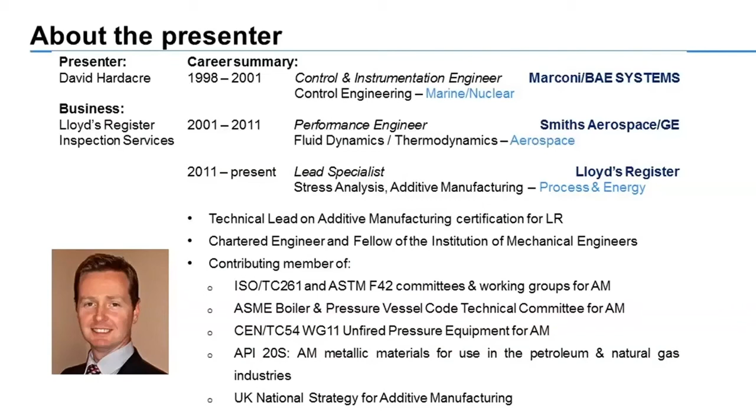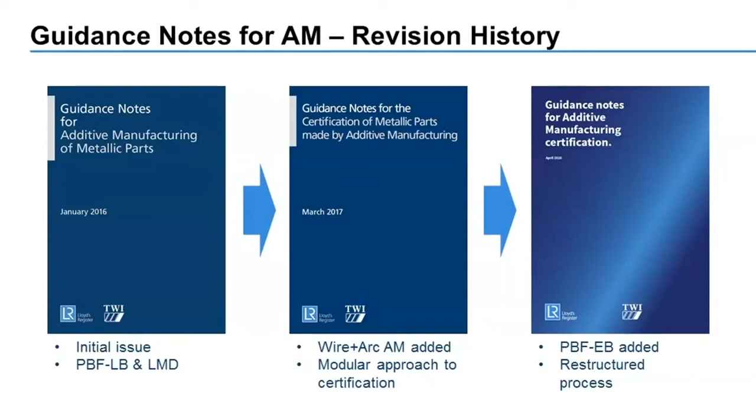So straight into the guidance notes. LR and TWI first published our guidance notes for the certification of additively manufactured metallic parts back in January 2016. It was updated in March 2017, and then very recently, April 2020, updated again. It's the updated version that I'd like to take you through briefly this afternoon, and then Carl will be talking about how that applied to the actual certification, well, qualification of the TWI facility.

So very basically, at a very high level, in order to certify a part which would have a known application, a prerequisite of that is certifying the material. In conventional manufacturing, if you were to purchase bar, forging, or plate, then that material comes with a material certificate. But with additive manufacturing, the part manufacturer is also the material provider, and so they need to satisfy both sets of requirements. So we need to certify the material as well as certifying the part.

Just like other material production methods, a prerequisite of certifying that material is qualifying the facility that produces it. So very basically, the fundamental foundation stones of certifying that facility consist of design, the feedstock, and the build plan. So the design, the 3D CAD model that inputs to the process, the feedstock, be it powder or wire for metallics, and the build plan, which would cover everything else - all of the build parameters, paths, etc. We'll talk about that in a moment.

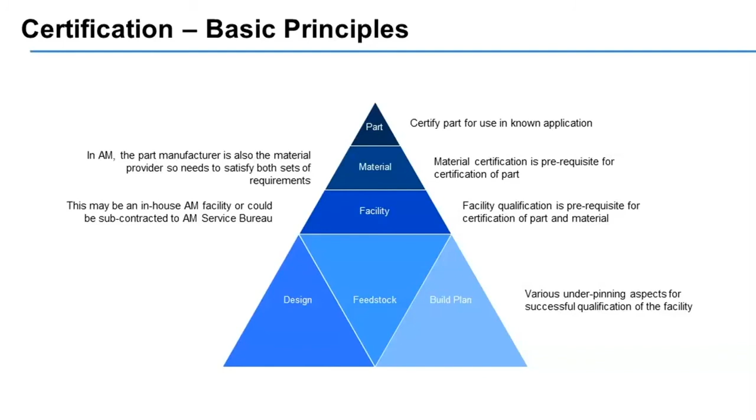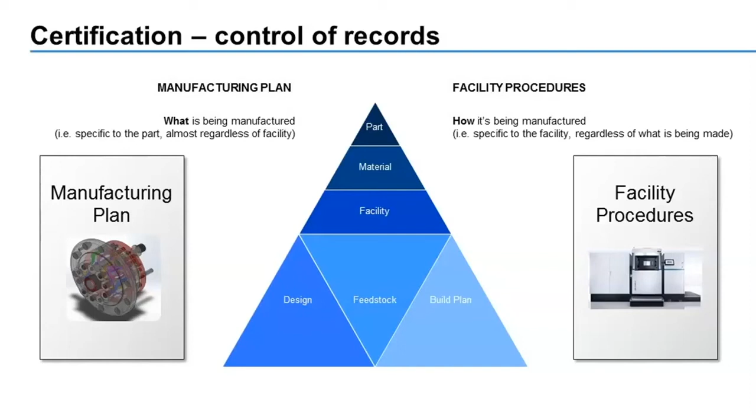So in order to certify a part, by the end of the process, we're basically compiling two sets of documentation, which is how we worked it with TWI through their facility qualification. On one hand, you've got the manufacturing plan - this contains everything that is specific to what is being manufactured, specific to the part and the material, almost regardless of the facility. On the other side, we have the facility procedures - this covers how it's being manufactured, things that would be typically the same every time, but aren't specific to the part that's being made.

So whatever you're making, those procedures and work instructions typically remain constant. When we're looking at the facility procedures and qualification, as well as the manufacturing plan, we can basically think about 5 functional areas: design, materials, manufacture, post-process, and inspection. Within each of those functional stages, it subdivides into three categories: people - so who's involved in the activities, what's the competency of those people, and how do we demonstrate that - the process itself that's being followed, and the product, so that's the output from each stage.

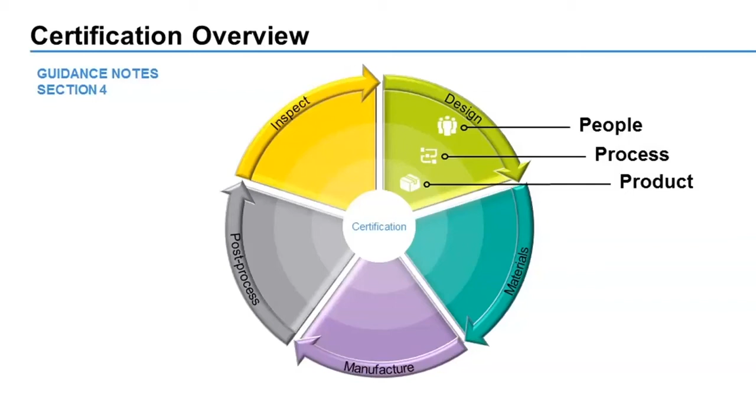And also, of course, these stages are interlinked. They don't occur in isolation. So when you're designing, for example, obviously there's a consideration of all of the other areas. You're designing for manufacture in terms of buildability. You're designing for post-process - certainly if you've got complex internal structures that you need to finish the internal surfaces of - and certainly you're designing for inspection as well.

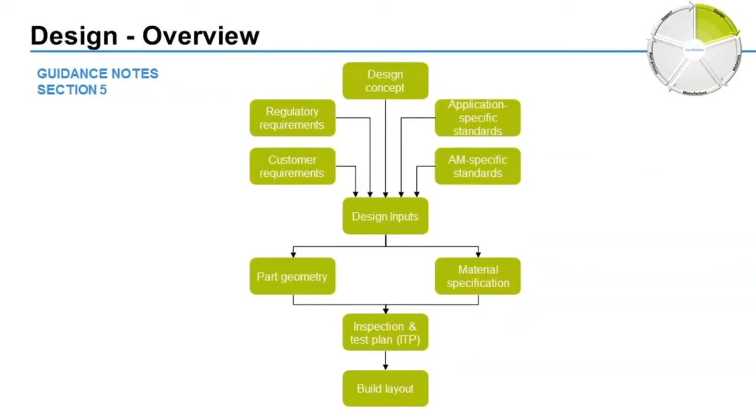So stepping through the guidance notes in terms of an overview, we start off at the design section, and primarily we start off with a requirements capture. So this is capturing all of the design inputs.

Typically a manufacturer will start off with a design concept. It might be a similar design, or something they've produced before using conventional manufacturing techniques that they now want to produce using additive for one or more reasons. But then you would take that design concept and first look at the regulatory requirements.

What are the legal requirements for this part? I've taken the example of a valve. If you were producing a valve in Europe, the legal requirements would be the Pressure Equipment Directive. There may be some application-specific standards, so a valve standard. The customer may have their own particular requirements, maybe in terms of pressure drop across that valve or discharge coefficient. And then when it comes to additive manufacturing, there will be some AM-specific standards as well, because unfortunately the valve standard doesn't contain anything about additive manufacturing yet. So the AM-specific requirements would hopefully be captured within AM-specific standards, but I'll come to that in a moment.

So at this point, you've collected your design inputs, you've got all your requirements, and it becomes a case of: how do we demonstrate that we're satisfying or complying with all of those requirements?

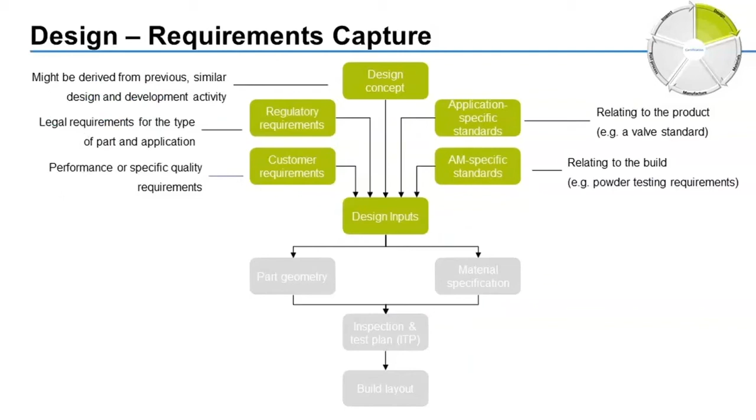So when you've got all of those design inputs, your part geometry, the manufacturer would develop the part geometry to meet the design inputs, and also select a material specification.

So the application-specific standards - for example, if we're talking about a valve, unfortunately there's nothing in there about additive at the moment. So there are some of the requirements, but not all of the requirements. In an ideal world, it would cover additive and everything would be developed in compliance with that standard. So we need to fill those gaps.

And the best way of filling those gaps would be to use some AM-specific standards. Now, I'm going to talk about this a little bit later, but unfortunately, not all of those standards are available either. So we still have some gaps remaining.

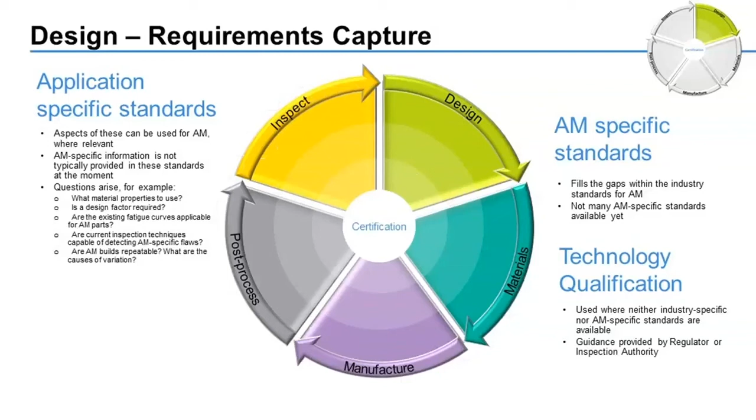And we fill those remaining gaps through a technology qualification approach. So that is used where there's neither industry-specific nor AM standards available. And it's about demonstrating an equivalent level of safety - filling in those requirements gaps to demonstrate that equivalent level of safety, which may include additional testing or inspection.

This is the slide that I was thinking of. So once you've collected all of your design inputs from those various sources, the manufacturer defines the part geometry. So if it's a like for like compared to the conventional, then fine - you would take the same probably design by rule approach that you've taken before.

But if you want to get the best out of additive manufacturing, then typically you're designing for the method that you're using. So it's at this stage that a manufacturer might employ some topology optimization, either for lightweighting or for some performance enhancement. If they were to do that, then the design by rule option basically disappears because you start to get very complex geometries. But the manufacturer is then forced down the design by analysis route, which typically involves something like finite element analysis.

In parallel with the part, of course, is the material. So those two things go hand in hand, part geometry and material specification. And I need to be clear here that this is the formed material - this isn't the powder or wire feedstock that's going into the process. This is the formed material.

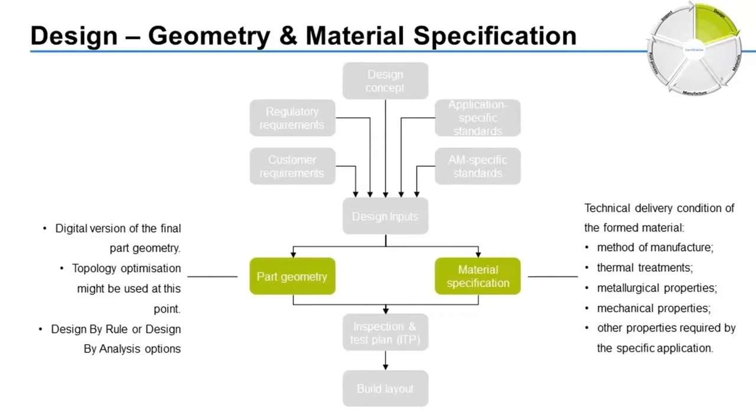So it's at the design stage that the manufacturer will specify that, and this is where you'll get the acceptance criteria that we'll test against later on. But the designer will also specify the delivery condition of the material, so that includes specifying any thermal treatments at the post-processing stage. And then moving on from those, the manufacturer will develop an inspection and test plan.

So how they plan to inspect it, how they plan to test the material, because of course before you start the process you don't have the mechanical or metallurgical properties. So those need to be established after the build in order to demonstrate compliance with the material spec and any standards or regulations that apply.

And then, of course, there is the build layout, which includes not just the part, but any test specimens, qualification test coupons, support structures, etc. And the number and location and orientation of specimens is part of the process.

Determining how many specimens you need very much relates to the part geometry, in terms of the number of different features, changes in wall thickness, or different types of feature that need to be represented. The specimens need to be representative of that part for demonstrating compliance with the spec. We need to understand that we've mitigated the risks not just of variability of properties throughout the part, but also potential variability throughout the build space. I'll mention that a bit later.

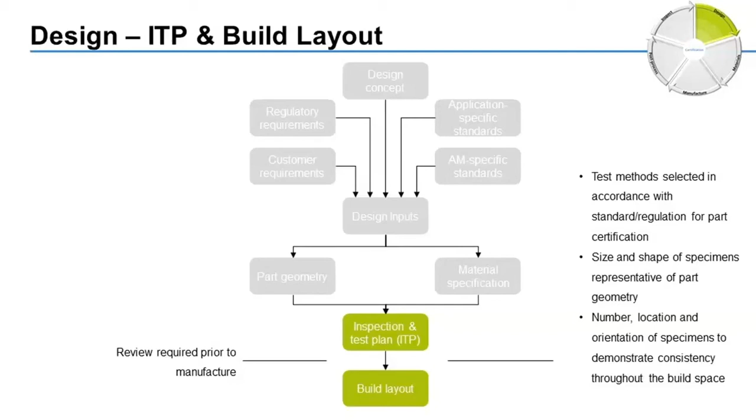Moving on to the material stage, from the design stage we've got our requirements capture and our formed material specification. The manufacturer also has their equipment, which we'll come to in the manufacturing stage. Typically they would then use this formed material spec, though they haven't made anything yet. It's important from the design stage to get buy-in from an inspection authority.

If you need third-party certification, it's very important to get buy-in from your certification authority before progressing to manufacture, because you do not want to find out later that your certification authority wanted more specimens, or different types or sizes of specimen. That all needs to be assessed beforehand, so there are no surprises or rebuilds later on. From that formed material spec, the manufacturer can now specify their feedstock spec.

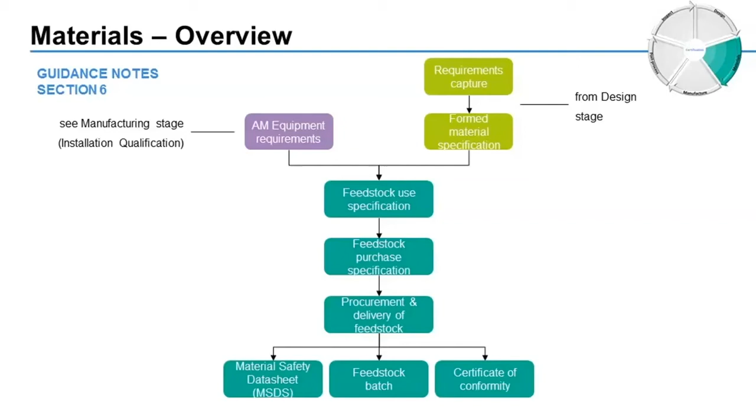When it comes to powder, if there's any recycling of that feedstock, there may actually be two specifications here: a use specification and a purchase specification. If it's always virgin, or if it's wire with no recycling going on, maybe a DED process, then they're often the same. But if the feedstock is being reused, those would typically be different, because you wouldn't want to order against the same spec you're using it against. If you order powder that is only just within the limits of that specification, the first time you recycle it, it may well go out of spec, and then you've got potentially a lot of wasted powder. So you would tend to develop a tighter spec for purchasing against.

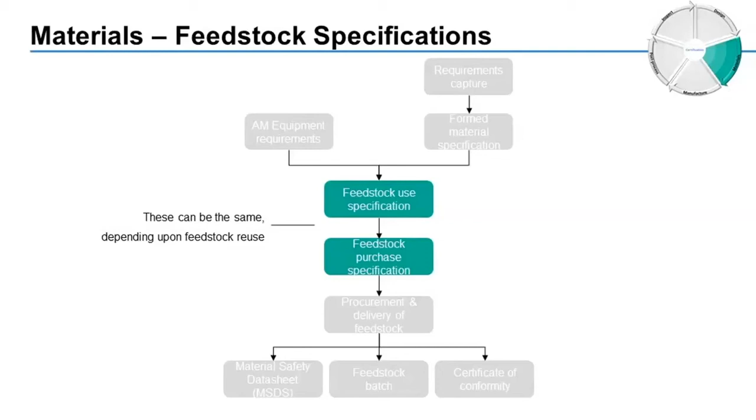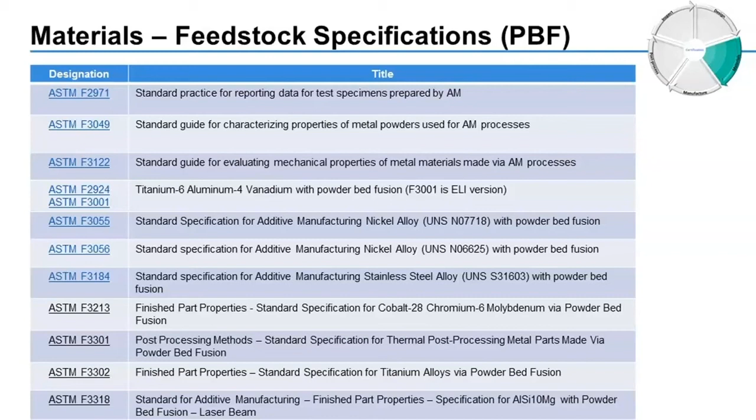When it comes to wire, typically if you're using a DED process, many manufacturers would purchase wire against a typical welding consumable spec, although many are now going down a more bespoke route, tightening up those specs again and ordering wires that are specific to their process. But it very much depends upon the equipment setup that you have.

When it comes to these feedstock specs, these ASTMs, they are just the starting point. They're very good in that they contain references to other standards and specs for different test methods. They have chemical composition requirements, minimum mechanical property requirements at ambient temperature, and they also contain some guidance for various thermal treatments.

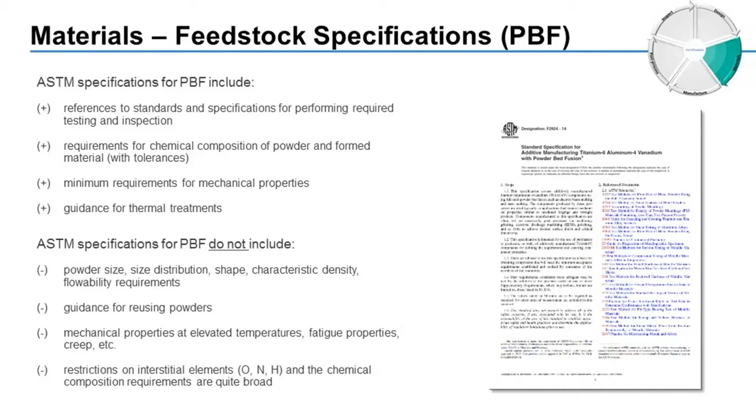What they do not include are other powder requirements, like regarding powder size and shape and size distribution. They don't have any guidance for reuse of powders, and they don't have any elevated temperature mechanical property data or other properties like fatigue or creep or corrosion. So they're not complete. They're a good starting point, but the manufacturer would need to develop those to make them fit to what they actually need for their application.

The specs are machine agnostic, meaning they're not targeted at any particular powder bed fusion machine. The manufacturer is responsible for the feedstock purchase spec, which would be based on those, and it's good practice for a manufacturer to record and compare properties for each batch, keep a log, and then they can learn from experience in terms of what works in order to either tighten or relax their purchase specs a little bit.

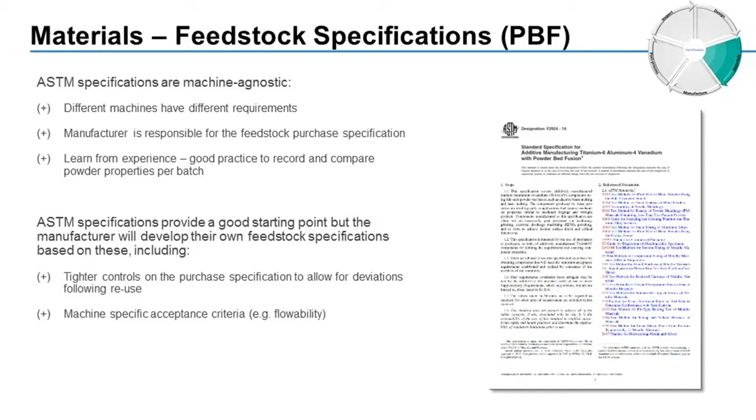When it comes to procurement and delivery of the feedstock, the powder would be delivered with a material safety data sheet and a fairly basic certificate, containing maybe chemical composition, powder size distribution, and perhaps not much more than that. So as part of certifying the formed part, it would be a requirement to do some further testing of that feedstock and characterization.

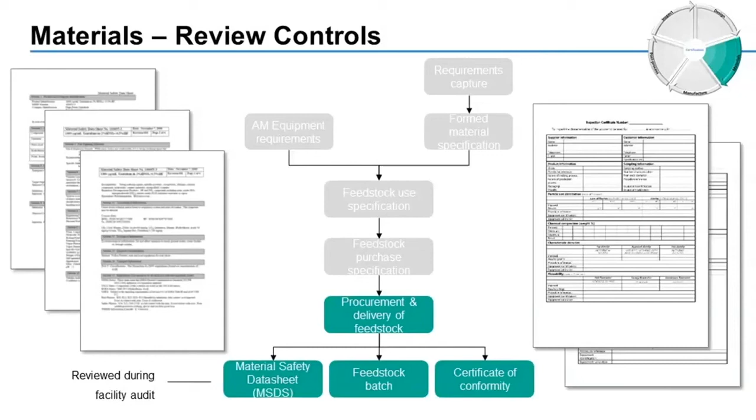The manufacturer, certainly TWI in the case of their facility qualification, had to perform independent powder testing at an independent lab and produced certificates that looked like this. This is a generic one, but it's the sort of information captured in a powder characterization: how it's sampled, which method was used, particle size distribution, again which method was used, with convenient references to ASTM or ISO standards. These are just examples of methods - you might use light scattering, for example, in which case you'd customize this certificate to your needs.

Chemical composition is fairly self-explanatory, but what's measured there would be compared against the spec, of course. Characteristic densities - apparent density as a minimum, apparent and tap density is pretty common. Some manufacturers will use those to develop other indexes, like the Hausner ratio or Carr index perhaps. Again that becomes part of the learning in terms of their register, what they know works for their particular equipment setup.

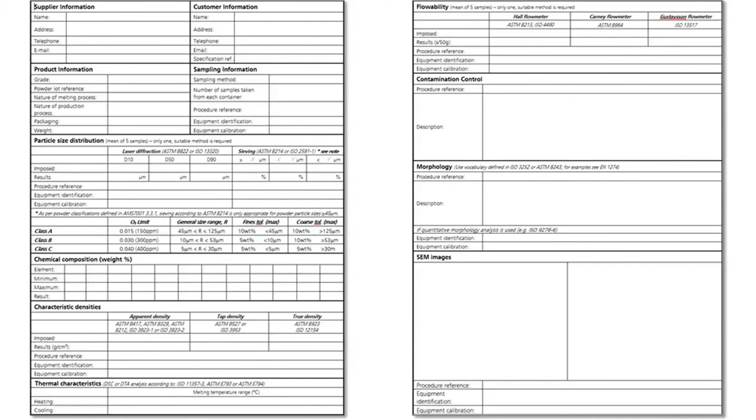So moving on to the manufacturing section. Once again we've got these inputs from our design stage - our geometry, our feedstock spec that we're going to use for the qualification. When it comes to qualifying the actual equipment and processes within the facility, you basically follow a three-step process: IQ, OQ, PQ. IQ is installation qualification, OQ is operational qualification, and PQ is part or product qualification.

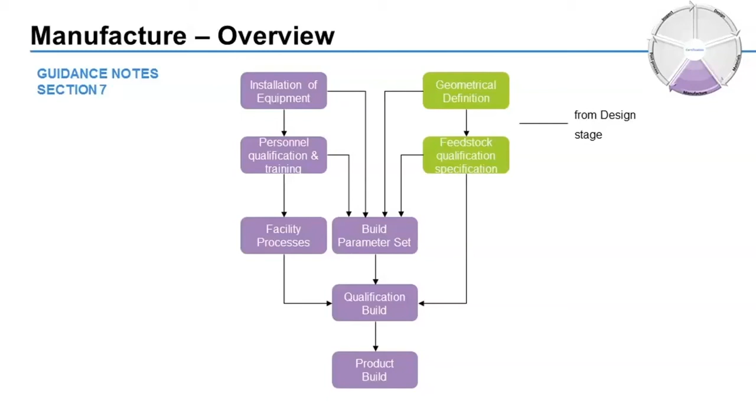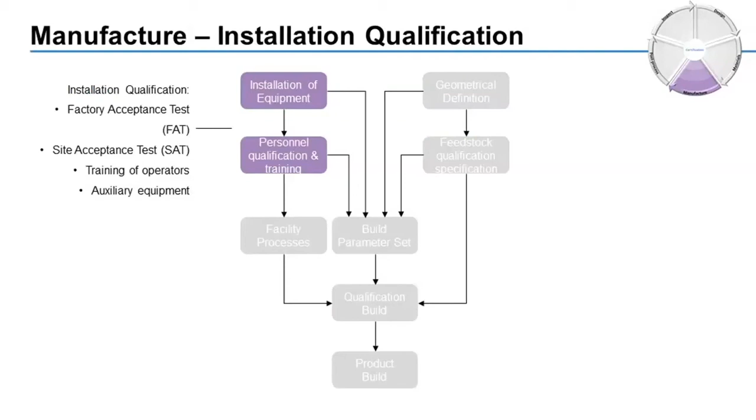IQ, the installation of the equipment, tends to have two steps really. There's the equipment manufacturer themselves who will perform a factory acceptance test of that equipment, and then when it's installed they do a commissioning activity or site acceptance test, with training of operators usually occurring there as well. There may also be some auxiliary equipment, things like lifts, sieving stations, that sort of thing.

Moving on to the operational qualification, the OQ stage - the quality management system is just the very first step. Certainly as part of the AM facility qualification at TWI, they already had a QMS, an ISO 9001 certified QMS system in place, which we would expect to see as a prerequisite really. It doesn't mean we wouldn't be able to continue with an AM facility qualification, but that tends to be the first step, just to make sure those sorts of systems are in place in terms of revision and quality control. But there's nothing in those that is AM specific at the moment.

When it came to the AM specific aspects, looking at the departmental procedures in terms of what the activities are, who performs those activities and when, and a level below that, TWI developed various work instructions with very detailed instruction on how each activity was performed. That could be something like a pre-build checklist, making sure you've selected the right substrate, how that's installed into the machine, fasteners correctly torqued, or if it's WAAM, clamps providing the necessary restraint, etc. Very step-by-step instructions, which quite often lead to different records being generated, which all need to be stored either as part of the facility procedures or within the manufacturing plan if specific to that part. For example, in the substrate example, selection of the substrate, especially if it was to become integrated within the final part, would be part of the manufacturing plan.

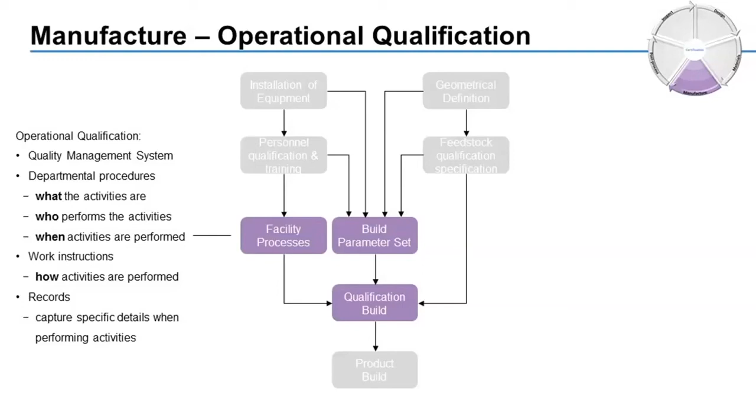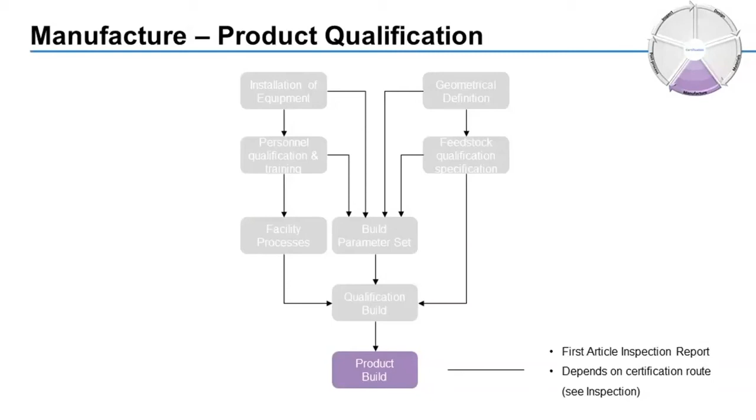And then after the OQ stage, where you've basically built qualification builds but not actually made any part, the manufacturer would then be ready to actually produce the first part. A first article inspection will be required for the first off, and then as you progress to further parts within that batch, there would be a much smaller test regime, just a few specimens, to demonstrate on a sampling basis that the manufacturer remains within the parameters of the range of their qualification.

When it comes to post-processing, again in section 8 of the guidance notes, you don't have to do thermal treatments first. You can separate parts from the substrate and then perform thermal treatments, but it's far more typical to do the thermal treatments first with everything attached, because one of the objectives is to take care of the residual stresses that build up. But it depends upon your process. If you're using powder bed fusion with electron beam, for example, that may not be such a big problem.

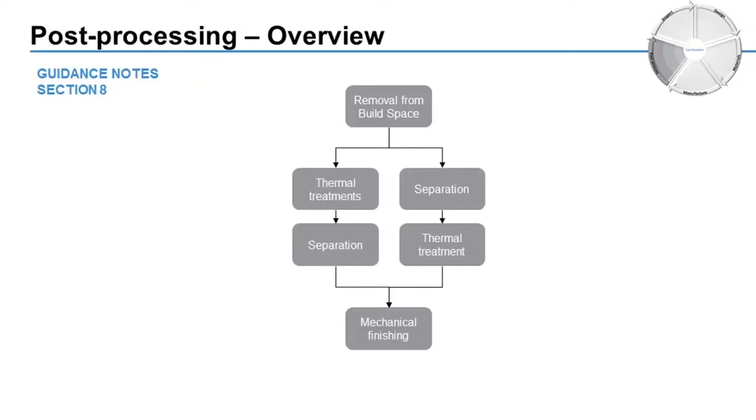It doesn't specify - the manufacturer can work either way, provided that the requirements are demonstrated through inspection and testing. But the point is that removal from the build space - there'll be a procedure for that in terms of the post-build checks, as well as the build monitoring, and that's witnessed during the facility audit.

Achieving the required delivery condition - so there might be a customized heat treatment or HIP stage depending upon the process used, or it may be a customized heat treatment, because standard heat treatments may not be the best for additively manufactured parts. And at this point, this should be the end of the property-changing processes.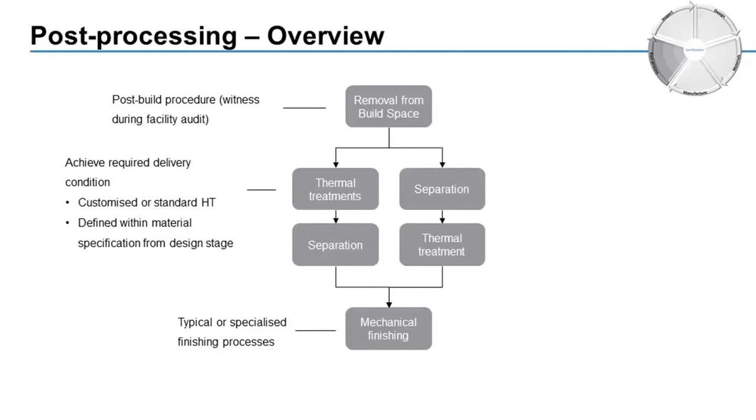So any mechanical finishing at this point would be about achieving the geometrical requirements - getting the right finish, the right geometry - but shouldn't really be changing the metallurgy of the material that's been produced. One point here, though, is that any post-processing intended to take place on the part also needs to take place on the test specimens in order for them to be representative.

So then moving on to inspection. Again, this is fairly typical in terms of the ITP - the inspection and test plan would have mechanical testing requirements, metallurgical test requirements, and non-destructive examination requirements. Depending on whether those criteria are met, it would be either a conforming item, in which case you produce your documentation that leads to certification, or a non-conforming item, at which point you need to get your customer involved on whether they would accept that as a deviation or corrective action.

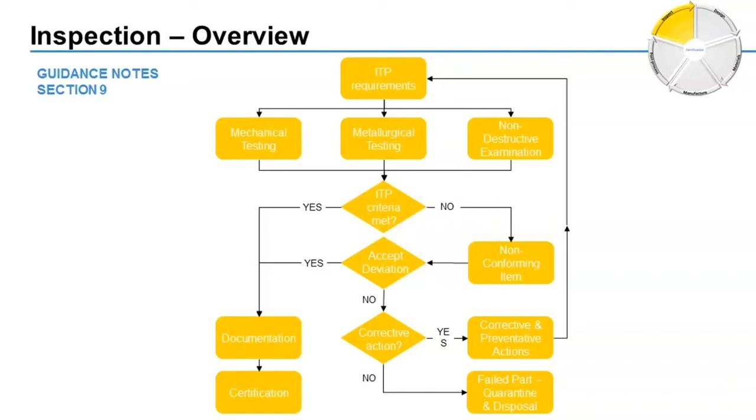So in terms of inspection, two routes: direct inspection or process qualification route. What I described before with the build qualification is the process qualification route. If you're making fewer - maybe a one-off part or smaller volume production - then the manufacturer can go down the direct inspection route, where the part is produced alongside multiple test specimens. We're short of time, so I'm not going to dwell on that, but if there are any questions, please put them in the Q&A.

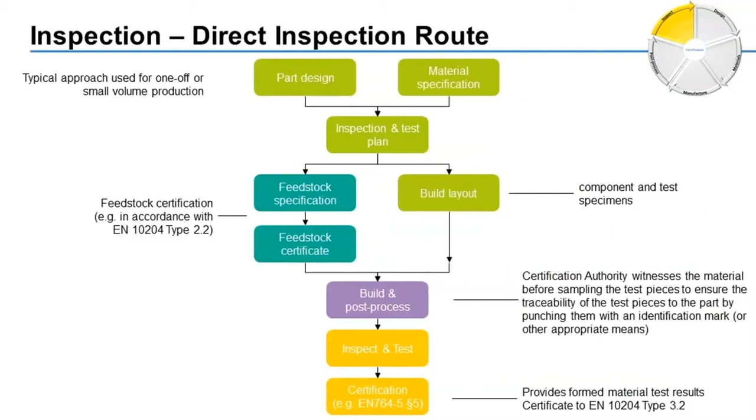And then when it comes to final certification, the first time, TWI, along with any manufacturer, would go through the whole process. But the next time they come to build a part, it's already a certified facility, so you wouldn't go through all of that audit again, unless something had changed - unless that facility audit was to be extended in scope, maybe adding a new machine or something. Typically you wouldn't repeat facility audits just for the sake of it, if it was producing a different part on the same equipment using the same procedures, etc.

And similarly, if you were going to a new facility but producing the same design, there wouldn't be the need to revisit all of the design assessment either, because there's no value in repeating that exercise once it's been done. One caveat here, though, is that witnessing of material testing is a prerequisite for any part certification. With conventional manufacturing, material has to be certified before you can certify the part. AM does not provide a loophole around that.

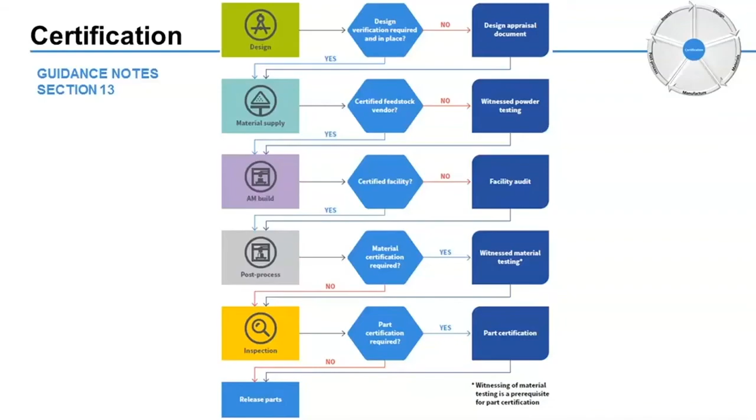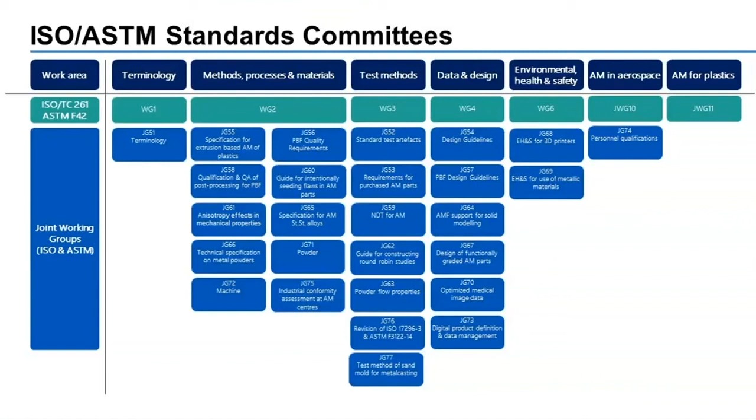I said I would mention standards. I'm running very short of time, so I'm sorry for rushing through, but these will be made available afterwards. I'm not planning on going through these in a lot of detail, but that's the landscape of the ISO ASTM standards committees.

This is split up into different joint groups looking at very specific items. These are the standards being produced at the moment. The takeaway is that the purple ones are published. If you remember the jigsaw puzzle I showed before, where we still have missing pieces, well all the blue ones here are those missing pieces. The turquoise or cyan-looking ones are drafts, available if you have access through your national committees. But the purple ones are published.

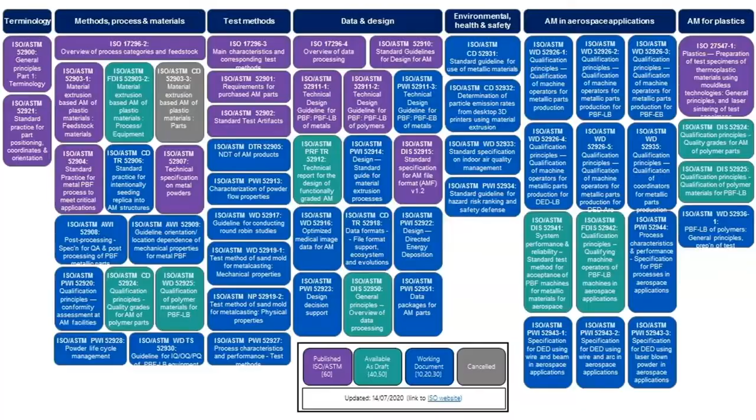Finally, when we look at the requirements capture and that standards landscape, and try to fill in those gaps within that capture exercise, this is an example of how it might look. At the start, you're preparing a route card, so there's some requirements in ASTM F3187, procuring the powder. Obviously the design—each of these shaded sections is a different role. So here's the design engineer who's selected the material spec, maybe performing a design for AM exercise, classifying the part.

When it comes to the equipment itself, the equipment provider is providing that equipment, 52941 perhaps, performing their factory acceptance test. They do a site acceptance test. The manufacturer goes through that OQ stage, goes through the PQ stage, at which point they're ready to produce their first part, where we've got all this process control.

There might be a recycling loop for the powder-based systems, thermal post-processing so HIP and other heat treatments, any other post-processes, non-destructive testing. Here's your test specimens coming down this loop with destructive testing and evaluation of those results, and then final inspection of the part.

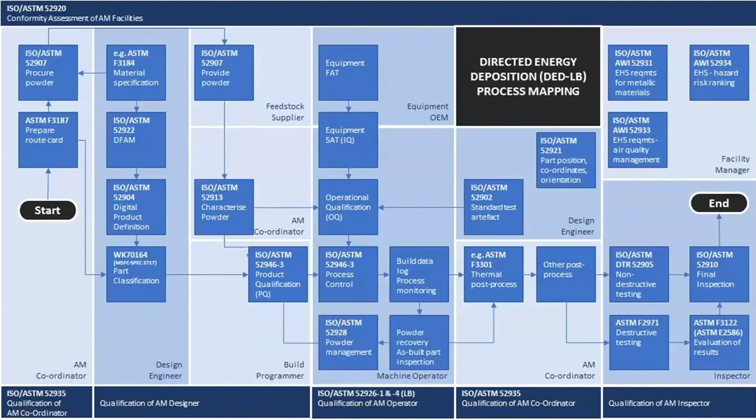One thing I'd like to highlight, running right through all of this, you've got ISO ASTM 52920, which is the standard for conformity assessment of AM facilities. It's not published yet, but it's on a fast track to publication. And down here at the bottom, we've got the qualification of the different roles involved at the manufacturer—so we've got an AM coordinator, 52935, you've got a designer, and you've got the equipment operator as well. No doubt more of those will be developed in the future.

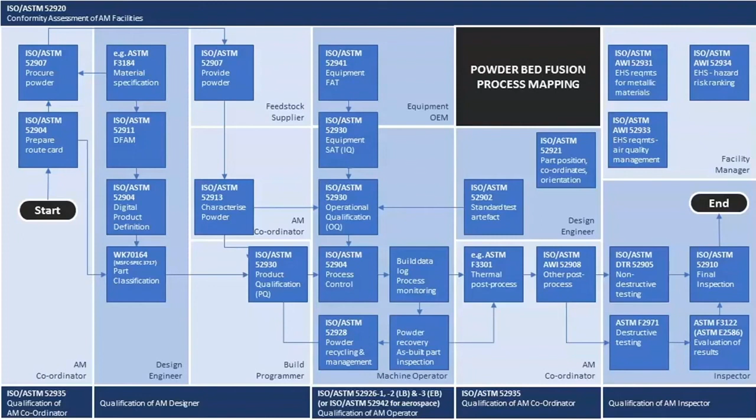Okay, I've probably gone over my time, so at this point I'd like to hand you over to Carl, who will tell you a bit more about the implementation of all of this at TWI.

Thank you, David. Could you pass me the ball? Yep, you should have that now. I believe Stacey's going to swap the presentation over—or do I need to carry on now? I'll just wait for the presentations to be swapped. Stacey, are you swapping the presentations over? Hi Carl, I have swapped them, are they not showing up for you? No, I'm just seeing David still, just the last slide of David. I don't know if anyone else is the same. Do you want to share your presentation then? Right, can you see it now, Carl? At the top of my window there's a little drop-down box where I can select to see different presentations. Right, there we go, sorry.

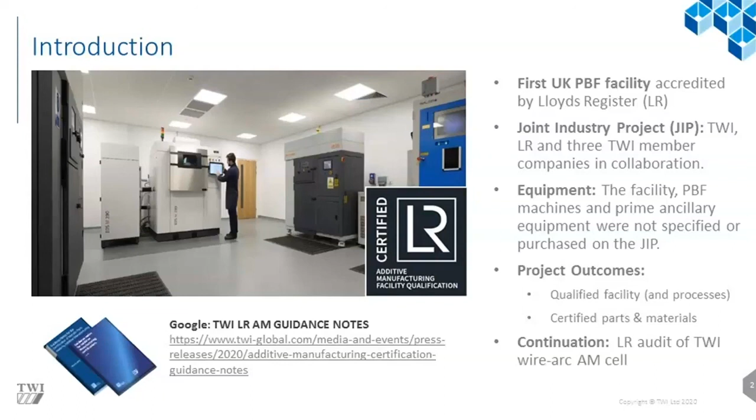I just want to run through some of the areas that we focused on specifically to achieve that accreditation. So what does our facility qualification actually mean? Well, within TWI we conform with the following.

We can conform with data development and control, reception, storage and handling of powder, powder bed process and build control, and then mechanical and metallurgical assessment of the formed material. Again, it very much follows the process flow of the previous presentation, and I'll dig into some of the more detail of some of these aspects in a couple of slides' time.

It's important to highlight that it incorporates our EOS M290 machine. You saw the image on the previous slide of several powder bed machines in our facility, but this qualification is only centered around the EOS, and also it is centered around stainless steel 316L.

The reason for that is because to achieve this accreditation, we've had to go through lots of parameter development, lots of procedures, lots of work instruction development, and so this was singled down to a single system and a single material.

But what that means now that we've gone through 3.5 years of development to achieve this, it now puts us in a strong position where we can offer to industry developments and uptake of different machines and different materials, all part of the facility qualification.

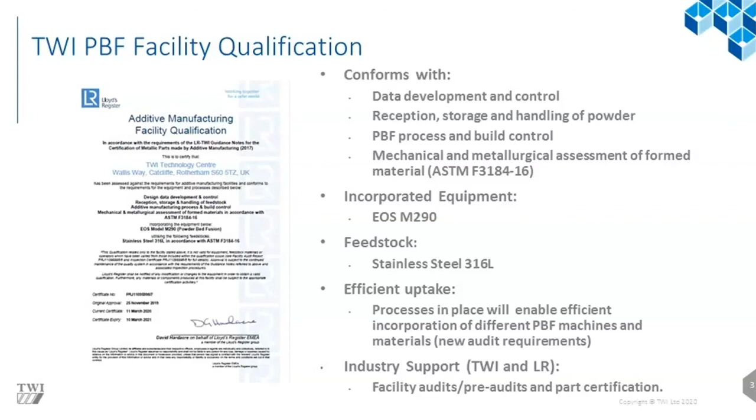Before I dig into a little bit more detail, there's often some misunderstandings between qualification and certification. So I just wanted to clarify those as best I can.

To understand the differences between the two, we first need to understand the difference between verification and validation. In very simple terms, verification considers: are all the right things in there? And validation is: are all the things in there correct? So what does that mean in reality?

Let's take the example of an Excel spreadsheet. Verification would involve checking that all the required formulas in that spreadsheet were entered correctly in order to calculate the required outputs. Validation would involve checking that all those values were correctly calculated, usually by specific test cases, i.e. through testing. So qualification is confirmation that verification has been completed and found to be acceptable, and certification is confirmation that the validation has been completed and found to be acceptable.

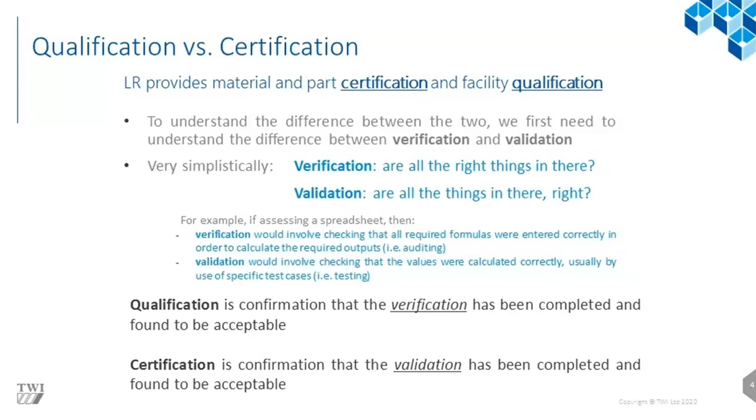In terms of additive manufacturing, a qualified facility is a facility that has been verified as having all the necessary equipment, the people, the processes, i.e. the work instructions, the procedures, all in place that will enable you to produce the outputs that have been qualified for.

Certified materials and parts are the outputs from a qualified facility that have been validated and tested to satisfy those requirements of a specification. Now that specification could be regulation, codes, standards, or requirements from the client. So in summary, qualification is possible without certification, but certification is not possible without qualification.

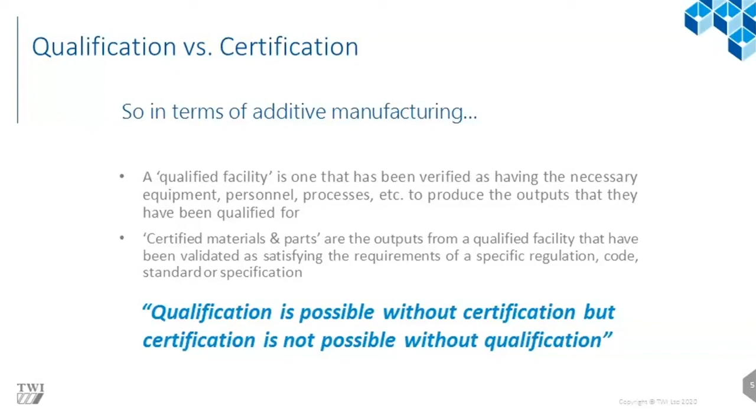In terms of what we did to achieve this, the slide here shows an outline flow chart of the test plan. Again, there's a lot of repetition here with the discussions that David Hardacre summarised in the previous presentation.

You can see that we have a manufacturing plan in a facility plan that's put into place. As part of that, we go through lots of stages with the client. Initially, it's the capturing of the customer requirements - that could be the design, appraisal, file conversions, including powder procurement and characterization, parameter determination, build layouts preparation. So there's a lot of front-end development and discussion that needs to take place with the client.

We then implement a route card system that effectively follows the build all the way through its manufacturing cycle. This would include the build on the powder bed machine itself, any hipping trials, removal from the base plate, heat treatments, machining, inspection and testing. There's no reason why some of this activity couldn't be implemented by third-party contractors, where the route card would have tear-offs that would follow the component around.

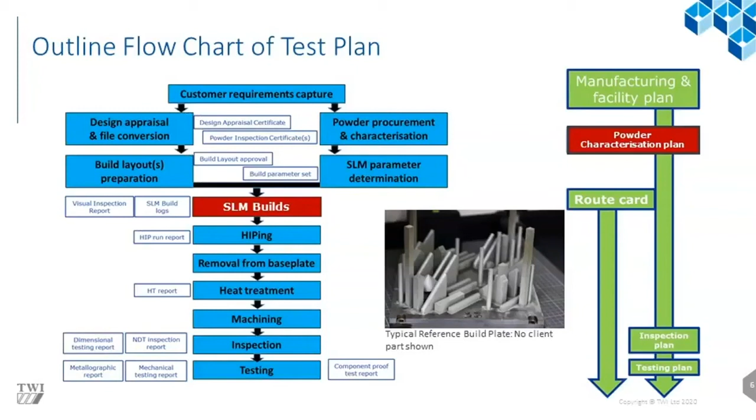In terms of powder sourcing and sampling, as discussed previously, the powder specification was 316L. We contacted multiple potential vendors and 3 offered to supply. In terms of the development route here, we initially ordered 50 kilograms of the material for the R&D activity.

From that, we took 200-gram samples, which were removed from each bottle and sent for analysis. Production quantities were 200 kilograms, and again we sampled those from 7 bottles, selected randomly, combined and sent for analysis as part of the ASTM recommendations.

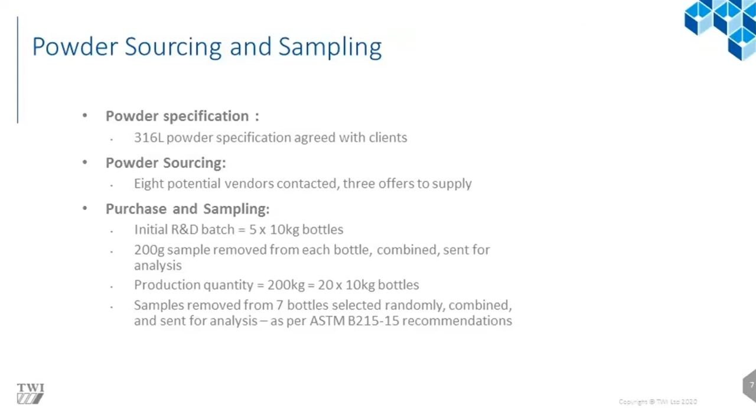There are also different recycling methodologies which are included in the facility qualification or accreditation. There are 2 options available. There's single powder charge top-up with virgin material, but this sometimes runs the risk of mixing powders with different histories, and chemical analysis only represents an average of those particles.

The other option, and the preferred one for us, was to perform SLM runs until all of the powder passed through once, then recombine the powder and repeat. This has enabled us to monitor the powders and have the same history of the entire batch, and chemical analysis is also more representative of all the particles in the process. Production powder sampling plan.

Before manufacturing, we sieve the powders to less than 63 microns after every use, and again another powder sample was taken. We also then reanalyze the powders to complete the recertification of that powder for every third recycle. Chemical analysis from the powder bed builds were analysed for comparison. So that was some of the activities involved in maintaining quality control of the powder through the lab and through the facility.

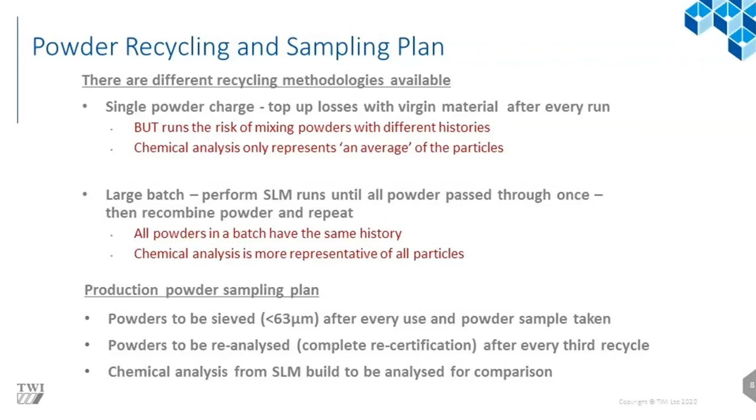In terms of chemical composition, I'm not going to go through all of these. Those of you that are familiar will be able to identify with the processes we used here for characterization. I think it's quite important to highlight that we did use subcontractors, and of course this was all acceptable as part of the accreditation.

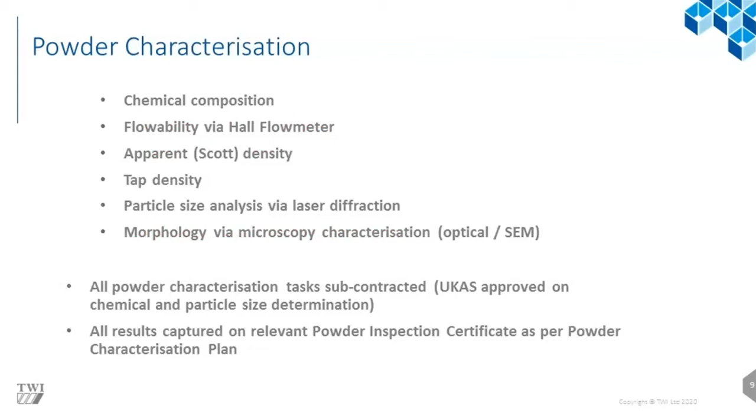In terms of process parameter development, we looked at a number of process parameters based on the geometry of the end use applications, and also taking into account that the material in question was stainless steel 316L. David mentioned we could either use manufacturers' recommended processing conditions or develop our own. We took the second route, so we proceeded to develop our own parameters, and alongside that we also developed our own procedure to develop those parameters.

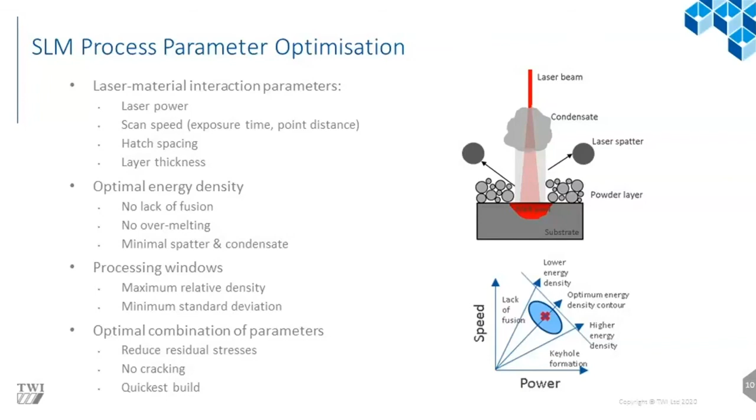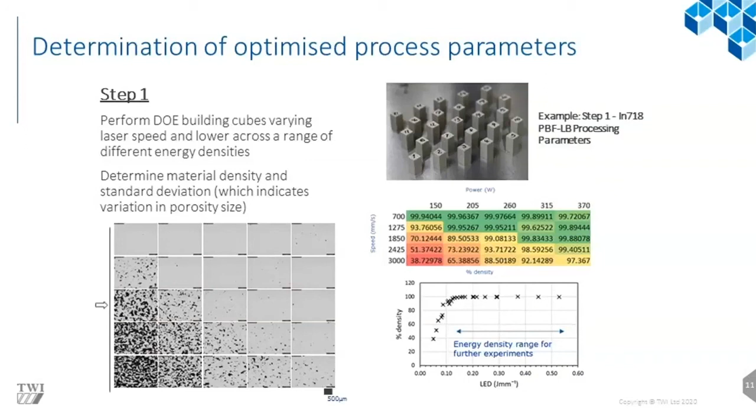Those familiar with powder bed processing know we tend to start by building lots of small blocks in a large test array to understand how the density of those cubes varies with different laser speeds and laser powers across a range of different energy densities, so that we can map out areas where the density of the required deposits are acceptable within agreed limits with the client.

As a second step, we can then use that energy density range, but start to vary the laser power and speed combinations to again determine material density and standard deviation, which indicates variation in porosity size. This was a very quick way for us to get to good material properties in line with the requirements of the components.

As David mentioned earlier, it's important to note that different layer thicknesses require different energies per unit volume, and different geometries - thin walls versus bulk material - may also require different parameters. So the parameters we selected would be suitable for a particular application and typical geometry range, not necessarily suitable for different geometries, applications, or materials.

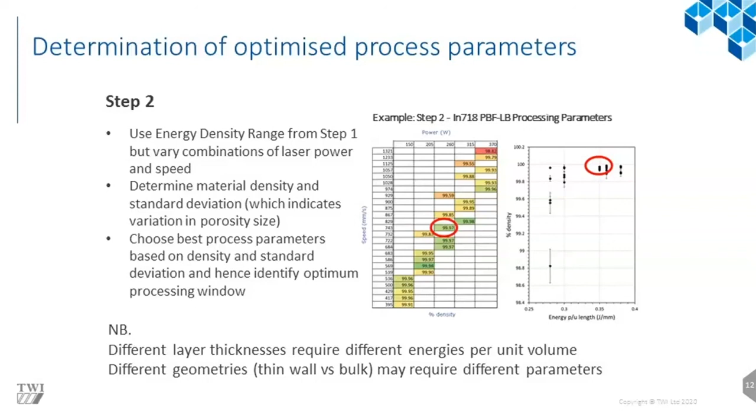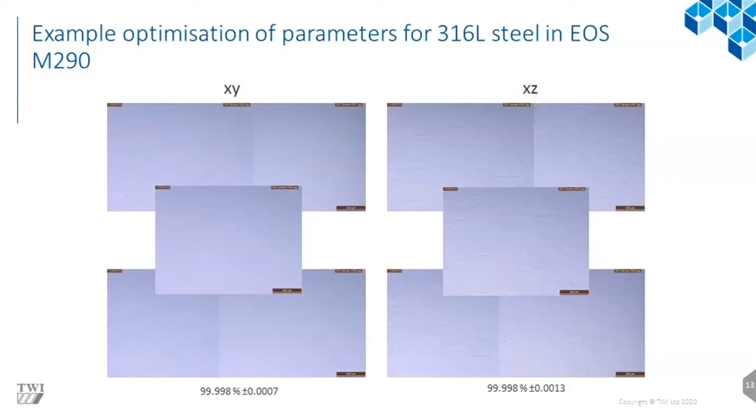Using that process, we were able to develop parameter sets for 316L processing in the EOS M290. You will see that we achieved good material density in both the XY and XZ planes. What's critical here is that we were able to establish consistency suitable for our facility accreditation. So we've developed the procedures to be able to certify the material, i.e. the processed powder in the EOS system.

So I appreciate it was a very short overview, but in summary, why has TWI ventured down this route? Well, we believe there are strong benefits for achieving facility qualification and part certification. Those benefits include certified parts that can meet industrial requirements and approvals, improved knowledge of AM processes and practices, and it can decrease the cost of certification when using a qualified facility.

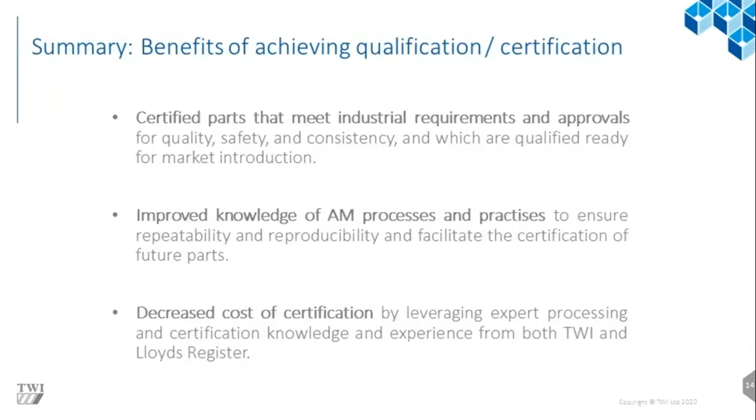I've got one question here. Which ASTM standard do you recommend in order to compare properties at elevated temperatures and below zero temperatures, such as 200 degrees C?

I can take that one, Carl. David? It will depend on your materials and your application. But for example, if you were talking steels, then ASTM A370 provides definitions for different mechanical testing, and within there it refers to other specific ASTMs for the different tests. So for tensile testing, ASTM E8 would be your default for ambient tensiles - ISO 6892 Part 1 would be the equivalent ISO. ASTM E21 would be used for elevated temperature tensile testing, so ISO 6892 Part 2 is the equivalent for that.

And for sub-zero testing, again it will depend on the material and application, but for example you might use something like ASTM E1450, which is tensile testing in liquid helium. ISO 6892 Part 3 will be the equivalent ISO for low temperature tensile testing. Hope that's useful - I'll type it into the comments as well.

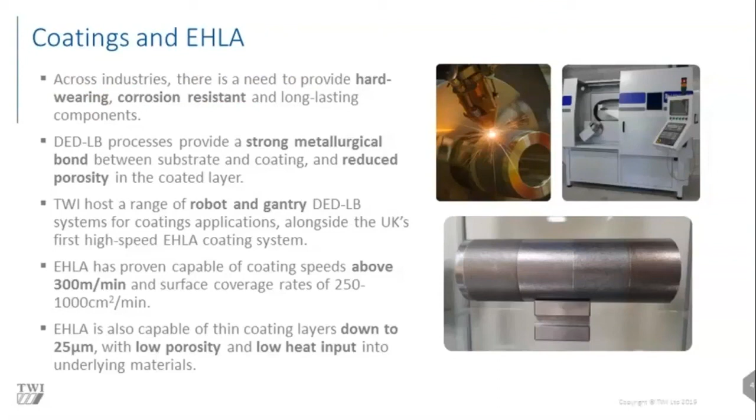As well as that, as part of the audit, if the same machine is being used for multiple materials, then there is an additional procedural requirement in terms of material changeover, because of course you've got an additional risk of cross-contamination between different materials. And with titanium it goes beyond that, because it's a reactive material. So there are additional hazards if you're handling titanium and aluminium, for example, which are reactive powders. So all of that is covered in the audit.

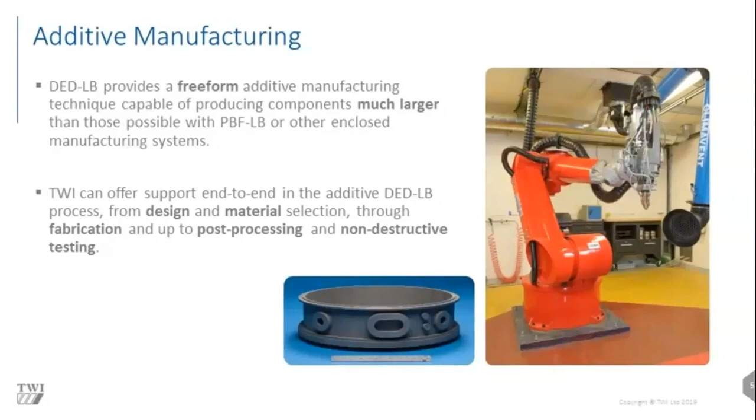Now, that answers the first part of the question. The second part: if TWI, for example, had performed a build in stainless steel and then went on to perform a build in titanium, would they need to re-qualify the machine in between those? No, they wouldn't, because they've already qualified for both materials, but they would have to follow their procedure for a material changeover. And within that changeover procedure, it would include...

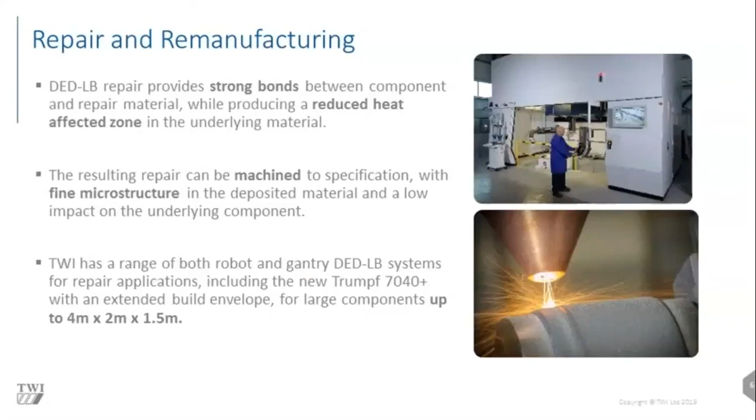I've got to be careful, I can't go specific unless Tom wants to declare exactly what you do. But they would have to follow that procedure to show that they were mitigating the risk of cross-contamination. It wouldn't be a whole new qualification.